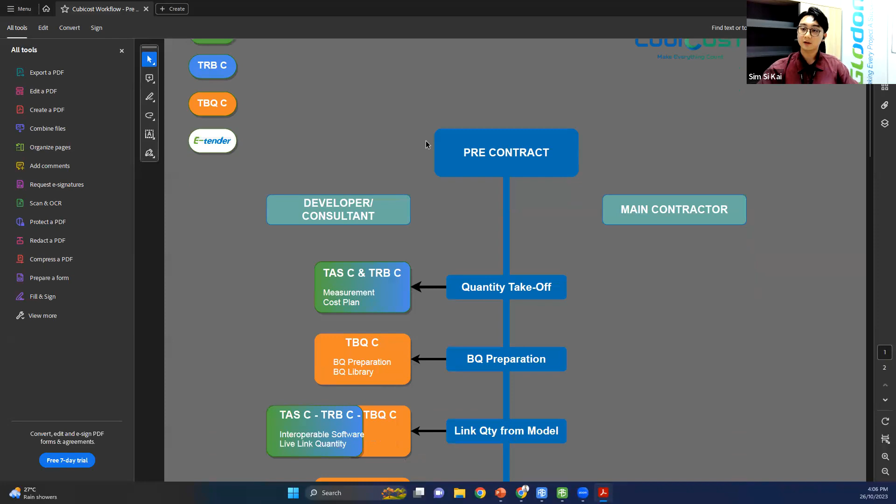This is a chart I created showing how our software can impact each stage during pre and post contract. Here we have the consultant, the main contractor, and the subcon. Let me open up a file for you to take a look. This chart shows the flow from pre-contract up to post-contract, and how our software can help at each stage. Basically, for quantity take-off, you can utilize our TAS and TRB to do the measurement, followed by BQ preparation, where you can price in your BQ for contractors. This is shown for the consultant, but no worries, the workflow can be implemented on the contractor side too.

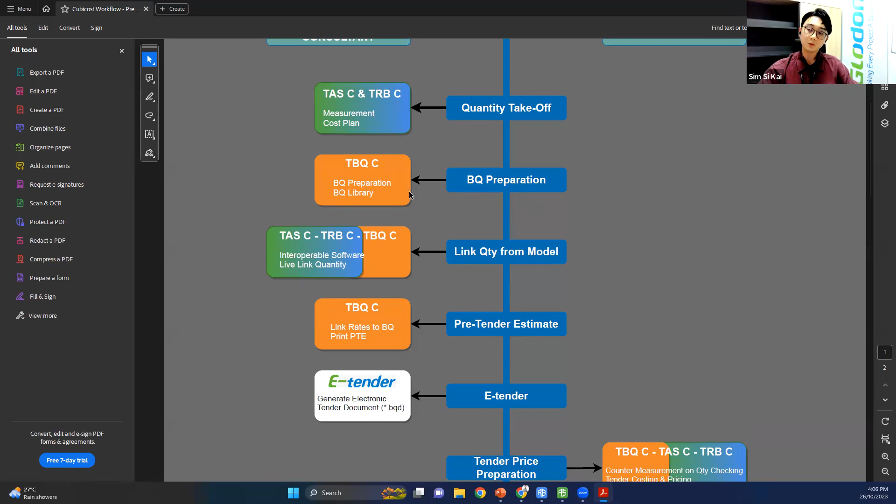And then once you've done your preparation for your BQ, next you can actually link those quantities to your BQ, and followed by you can actually do your pricing.

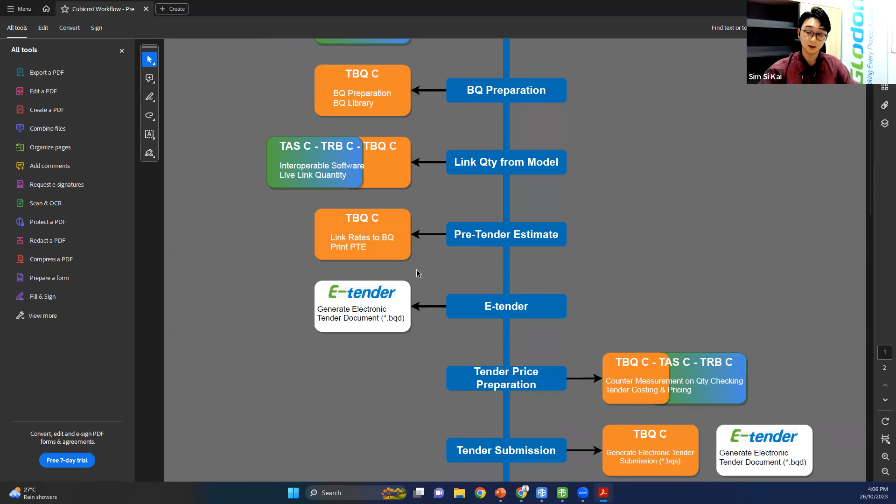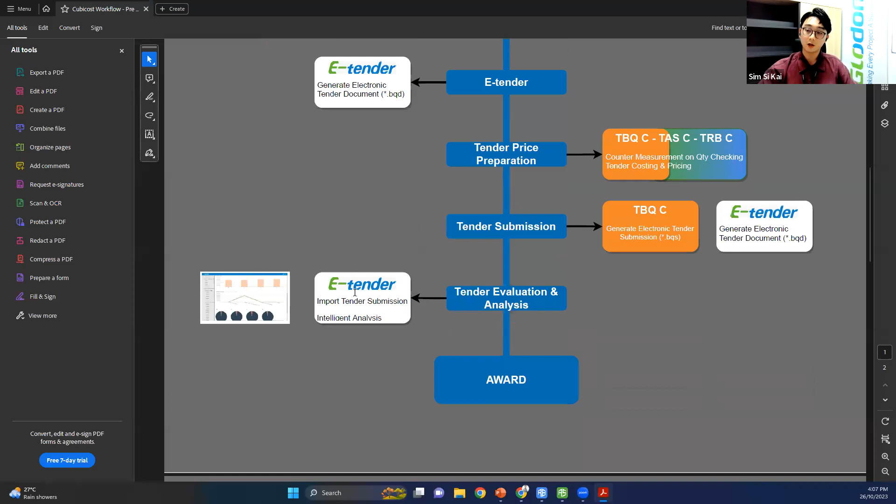And again, our TBQ software also has e-tender. So when you're dealing with a consultant that uses our software, they are able to prepare e-tender, which is what we call a BQD file. So for those contractors who have our software, they can import it into our TBQ software and begin pricing. Once they begin pricing, they can submit their tender submission, and then the QS will evaluate, and hopefully you get awarded the project.

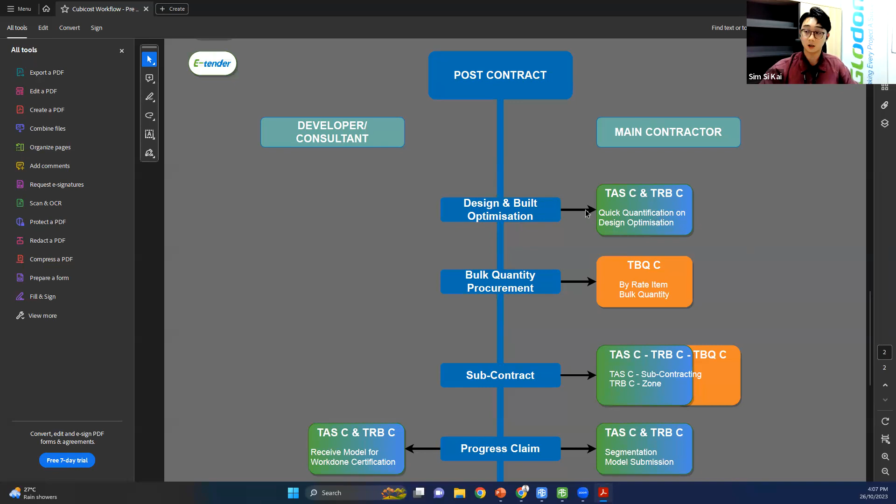All right, so now down to the post-contract. This is more focused on main con. As you can see here, design and build optimization. So you can utilize our software if there are any changes in your drawings, to make those changes and directly see the quantity impact. Then bulk quantity procurement, you can utilize a feature which later on I'll show you all how we can actually do bulk quantity procurement.

Followed by, you can also extract out, like for example during our post-contract, we do have progress claim and so on and so forth. You can utilize our software to do it. Or other than that, for example you have multiple subcons, you can also segregate those quantities accordingly based on those subcons.

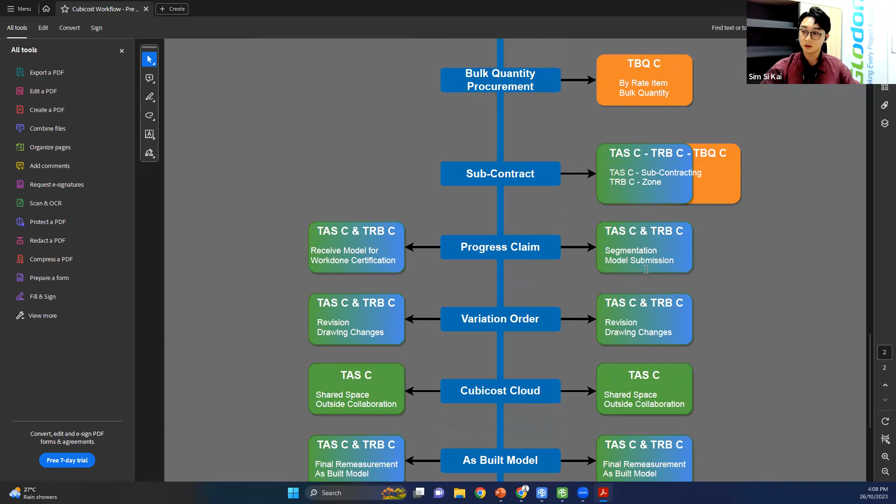Then in terms of progress claim, like I said, you can use our TAS and TRB software to do it, and followed by variation order also can be done. You can also share those models up to our cloud, whereas parties that do not have our software can access it and also view those models. And followed by, lastly, which is remeasurement.

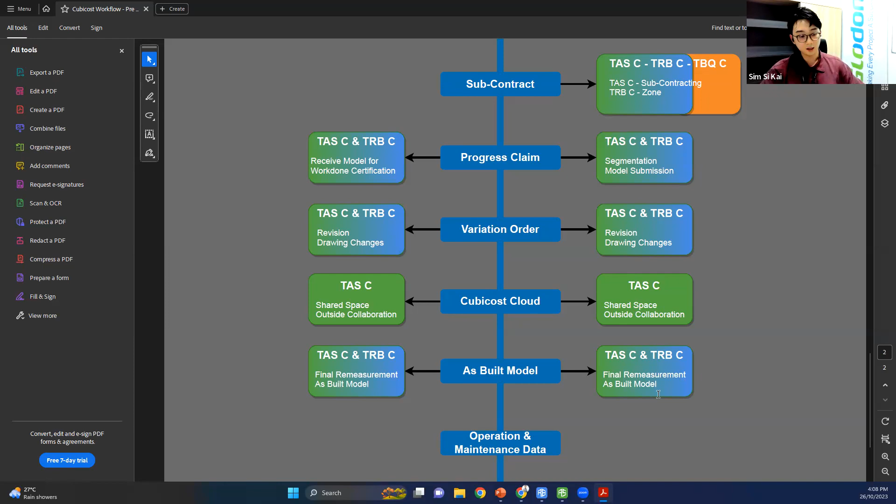If this flow is followed accordingly, basically when it comes down to remeasurement, there's no need to do remeasurement anymore because your model itself and your quantity itself is already up to date. And with that said, operation and maintenance data, and that's it. So that will be the pre and post contract.

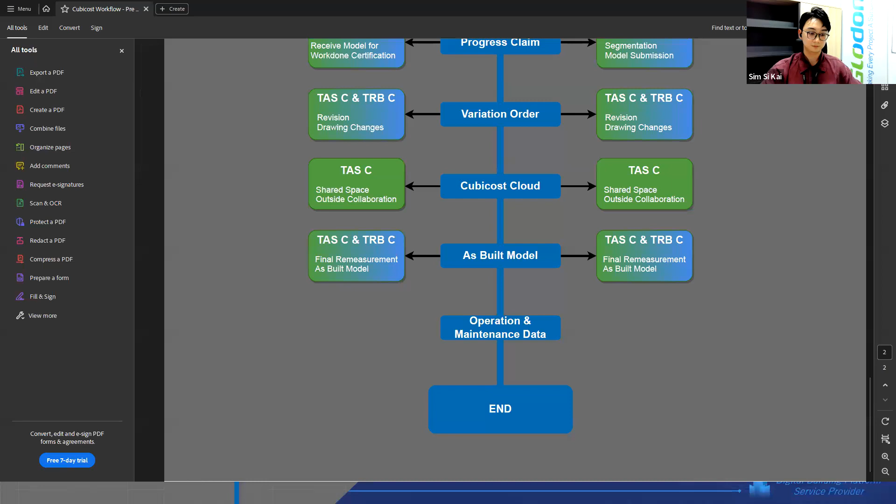So followed by, the next thing is why BIM? What's the purpose of BIM? Why do we need to do this? Why do we need to implement this so-called BIM flow? And what is the main benefit out of it?

And with that stage itself, when both parties are not communicating at the early stage, and only one of the parties joins after, there will be bound to have a lot of, for example, miscommunication. That will be the number one issue — miscommunication, or workability within that design itself. So when both did not communicate at the early stage, only after, that is going to cause a lot of errors at the end. And in the construction industry those errors can be solved, yes, no issue, however you tie back to cost.

So if using BIM, this BIM process is able to simplify, to create an environment, a platform where it allows everyone to stay communicating since the early stage, since the beginning, from design and construction concurrently. Everyone is actually communicating, everyone can receive the latest information. So by doing so, everyone is communicated, then the error will be reduced greatly. Again, when there's error in construction, yes it can be solved, but it requires cost.

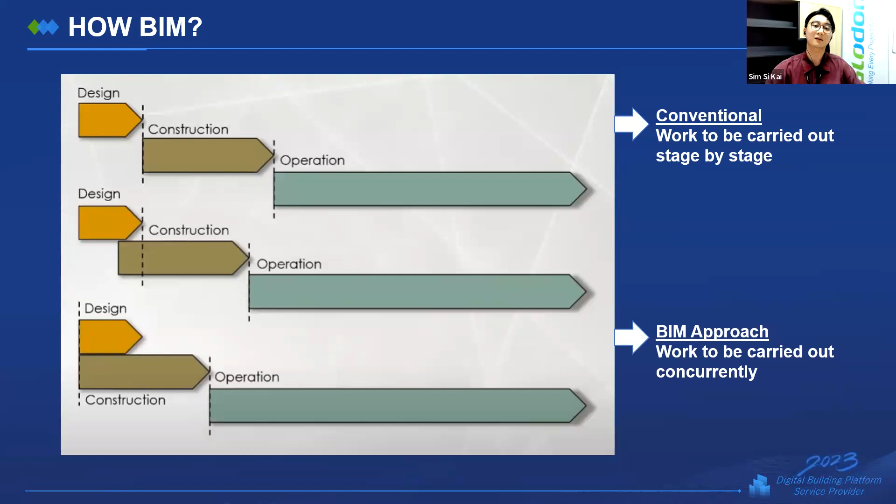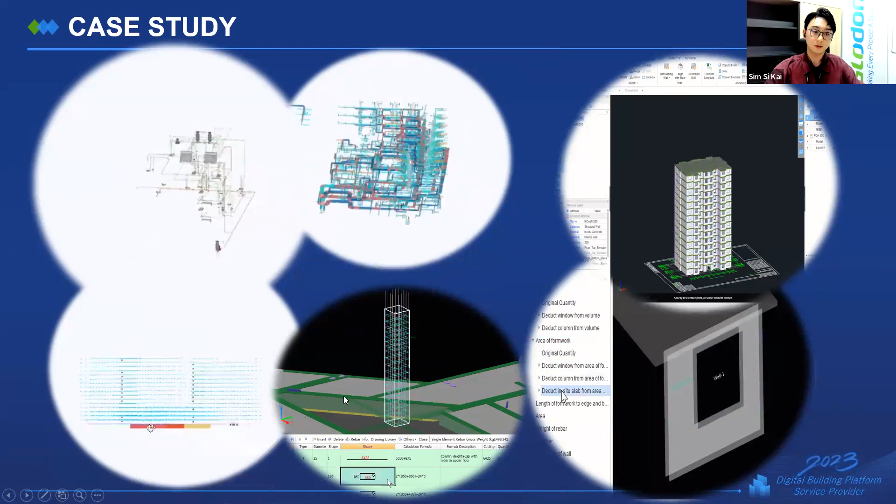How are you able to utilize all this software during tender bidding preparation? So there's a tendering checklist. What are the checklists that we require to go through? First of all, type of contract bidding. So we need to understand the type of contract that we're going to bid for, because that is going to dictate how we are going to do the pricing and so on and so forth.

Next, strategy based on contract types, quantity checking method, followed by tender costing and pricing, and lastly, electronic tender platform. So these are the tendering checklists that we have to go through first.

Let us go through a little bit of background on the types of contract biddings. There are several types of contracting approach between owner and contractor, and each supports different project environments and approaches. It is a must to understand what type of contracts for bid and procurement when receiving a tender, in order to know what strategy to adopt using Cubicost. So we need to understand what kind of contract we are actually dealing with, that way we can tailor our Cubicost workflow to it.

Okay, so the pain point. In Malaysia, I will focus on Malaysia. During the tendering period, it's always short, about 2 to 3 weeks, and 3 weeks is arguable. So normally it's about 2 to 3 weeks.

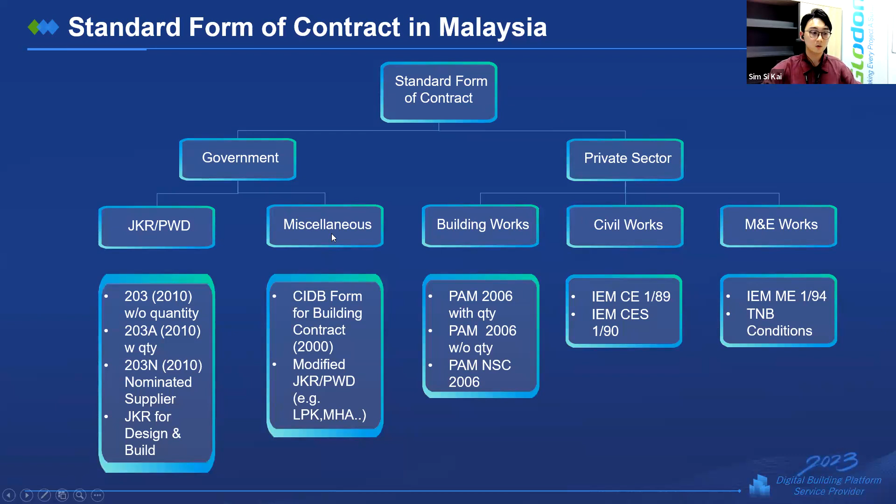So why do we actually have to go through all these PAMs and the contracts? Because I would like to bring up one important point. Contract or pricing arrangement, we have for example these 4 types: lump sum or fixed price contract, time and material contract where scope is not clear, cost plus contract, unit pricing contract. For these 4, we can't run away from one thing.

Quantity is the basis of cost estimation, regardless of multitude or magnitude. So you can't run away from quantity, you can't run away from measurement. So by using this 5D BIM solution, how can we help you increase your efficiency when it comes down to measurement? So, how to utilize Cubicost software in different types of contracts.

So again, this chart also would like to bring out the urgency of why using a 5D BIM solution is so important. Regardless of what kind of contract you are facing, you still can't run away from the basis requiring you to do measurement. So these are the urgency points I would like to bring up.

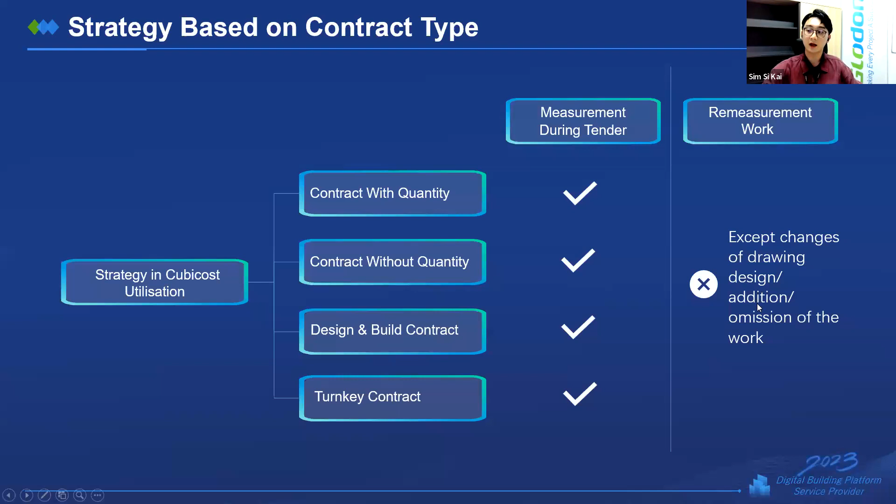So again, quantity checking method — background. For private projects, most clients will appoint a consultant QS for tender document preparation, inclusive of BQ with provisional quantities. Followed by, during the tender stage, contractor QS also receive tender BQ with provisional quantity and a whole stack of drawings, either hard copy or PDF soft copy. And then it's the contractor QS's responsibility to make sure the rationality of the BQ provisional quantity, which will form part of the contract.

So the pain point still ties back to what I've shared just now — during your tender stage, the duration for the contractor to do the bidding is very short.

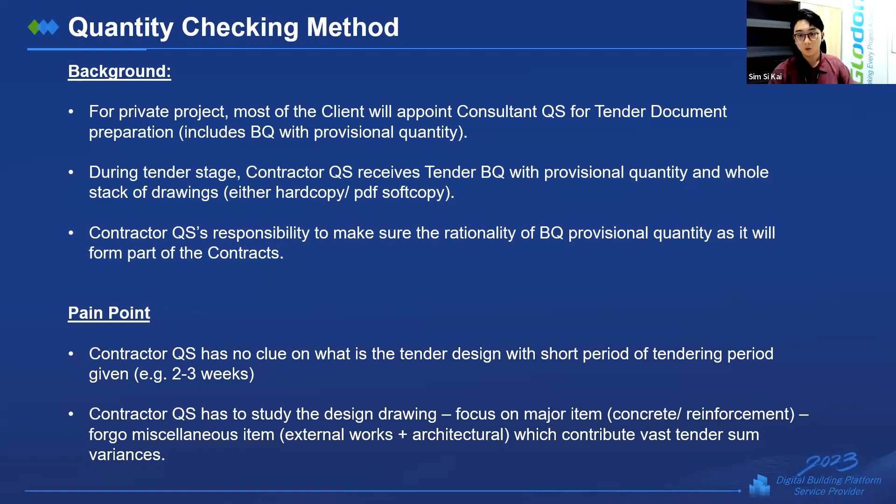If the nature of the project you're dealing with is very big, you do not have the time to actually check and reduce your risk. The only thing you can do is go through those trades that will bring a big impact in terms of pricing. We will actually go through that. Those miscellaneous items, we do not have time to go through, so we can only trust whatever the QS consultant provided to us.

So how do you actually do the quantity checking method? These are the things: quantification and report. You need to focus on these few aspects: quantification and reporting, drawing source, method of modeling, and also live link quantity. So in terms of your Cubicost software, how are we going to play around with this?

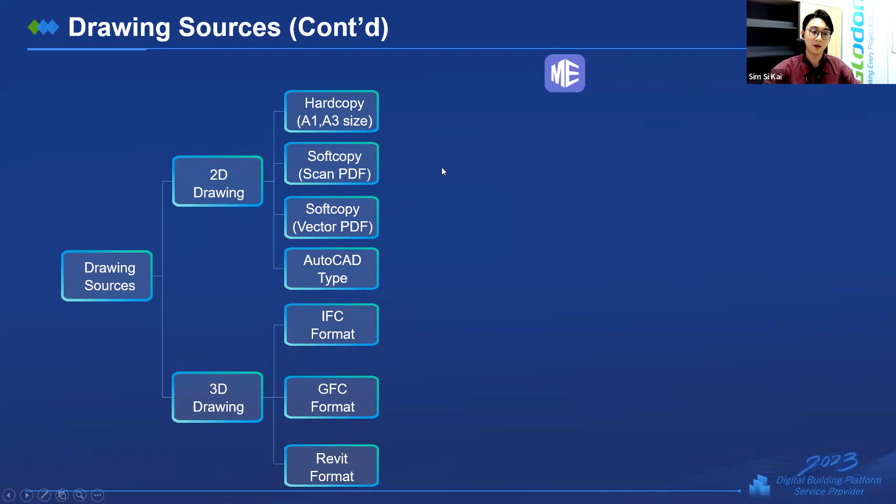So how is the software able to help you with each of these? Basically, TAS, TRB, TME can cater to both 2D and 3D drawing. In terms of 2D drawing, if you have CAD drawing or vector PDF, we have this function called auto identify method and auto, so it is much more efficient. But if you have hard copy or soft copy, we do have methods to actually cater for it.

Now let's talk about 3D drawing. When it comes to 3D drawing, the most famous one is Revit format. Can we actually communicate with other software? Yes, for example, with Revit, we can import the model into our software and then quantify it. There's also this argument stating, hey, I already have Revit, why do I need to purchase your software? Because Revit itself also does provide us quantity.

Yes, Revit does provide us quantity, but we have one thing extra compared to Revit, where our software is actually embedded with the local rules, which is SMM2. All QS measurement is actually governed by SMM2. So therefore, Revit yes, they do provide you quantity, but Cubicost software brings it to the next step, which is they provide you quantity based on SMM2.

In terms of manual method, we'll be creating manual element creation, element properties, and entity input method. In terms of auto, you can do auto identify, click identify, drag and drag, which I'll go through one by one later on. So in terms of 3D drawings, we can also import IFC files and also Revit folders.

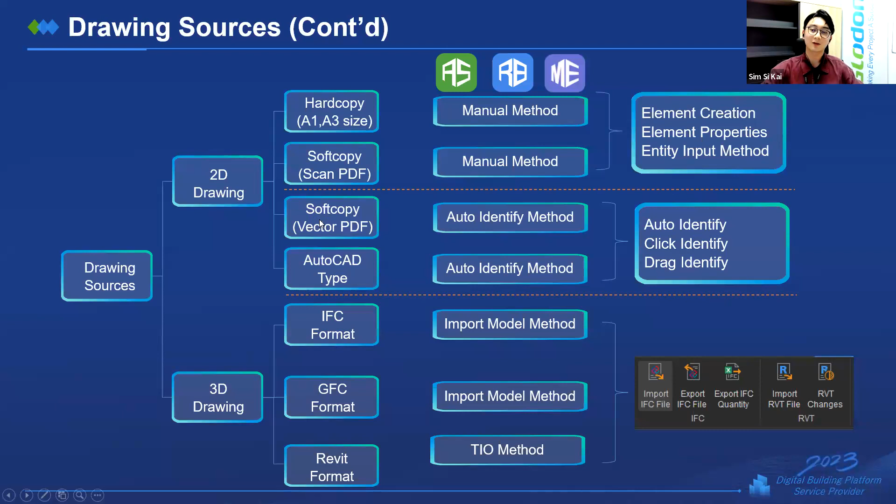But in current Malaysia, for contractor side, mainly they will only get soft copy, vector PDF, and if it's lucky enough or the contractor is willing to buy, then they will actually get the CAD drawings. So in terms of method of modeling, let's go through the background. The drawing type determines the method of modeling to be adopted by the user, so project type matters as well on what is the method of modeling.

Importance of resources availability and allocation: as you can see here, our software is a quantity takeoff software. In terms of the source of the data, it actually comes back to the drawings that you receive. The drawing you import into our software, then we will calculate from there itself.

So it comes down to pain points: contractor QS not familiar with the method of modeling available in Cubicost, hard to identify a champion user for one company to allocate the resources, and lack of confidence and practicality of work collaboration among colleagues. These are the pain points that I was able to list down for a user, for example, a contractor who just needed to adopt our software. These are the pain points they will actually face, but no worries, me as a customer success consultant will be there to help you.

So without further ado, let me show you my software. What can you actually do?

All right. So from here, as you can see, this is the software that we call TAS C, which is measuring architectural and structural work. So from here, this is where all the projects that I've done previously are. From here, you're able to create new. By clicking on New, you can actually create a project.

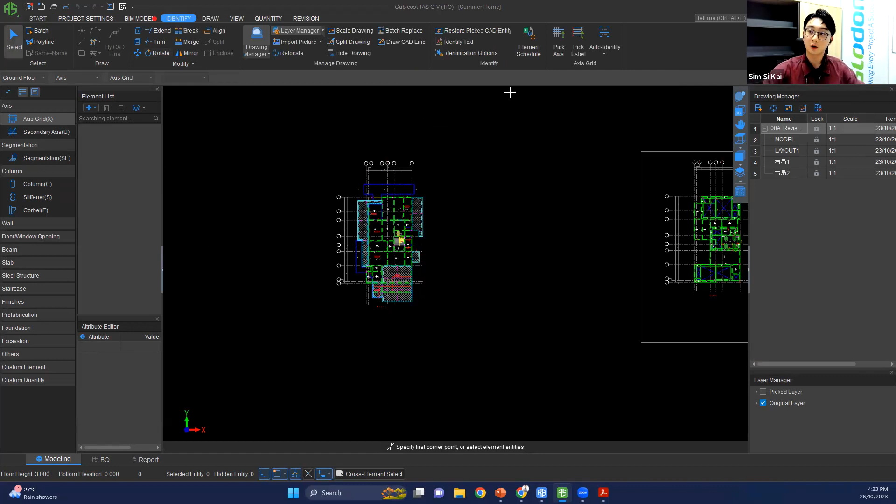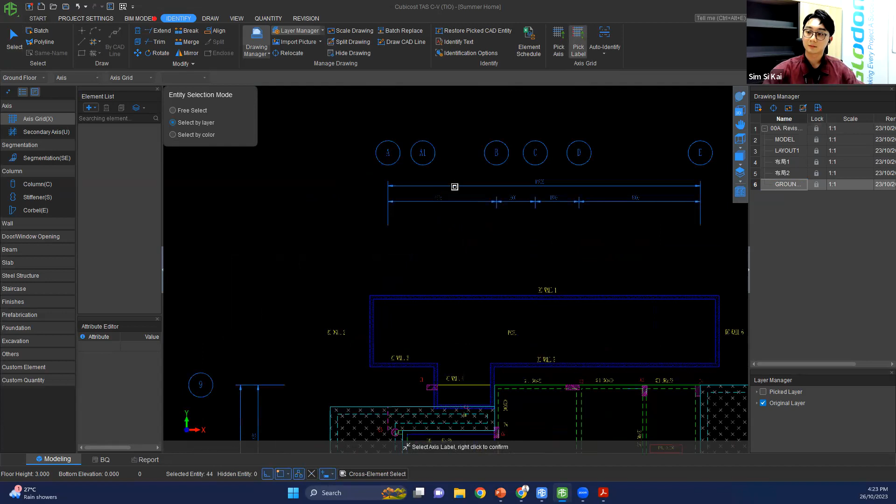And then here is where you can also input the number of floors for each one of the zones, basically. So once you're done, you can proceed to begin modeling. So how our software works when it comes down to modeling is you can add in the drawing here. So for example, I will use the structural. As you can see here, once you're done, you can begin creating your model. So first, I will split the drawings. And once I'm done, I'll just create an axis point. And then auto identify. So let me show you the drawing.

So now I'm going to demonstrate how we can calculate concreting for column, which is your meter cube quantity for column. So from here, we can directly use this auto identify because we are using CAD drawing. So you can use Pick Sideline. And with that said, you have successfully modeled out 34 columns with ease.

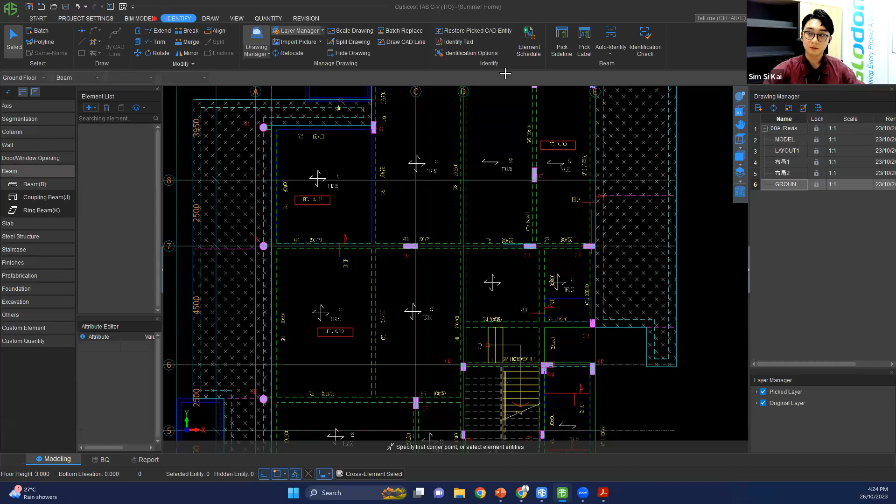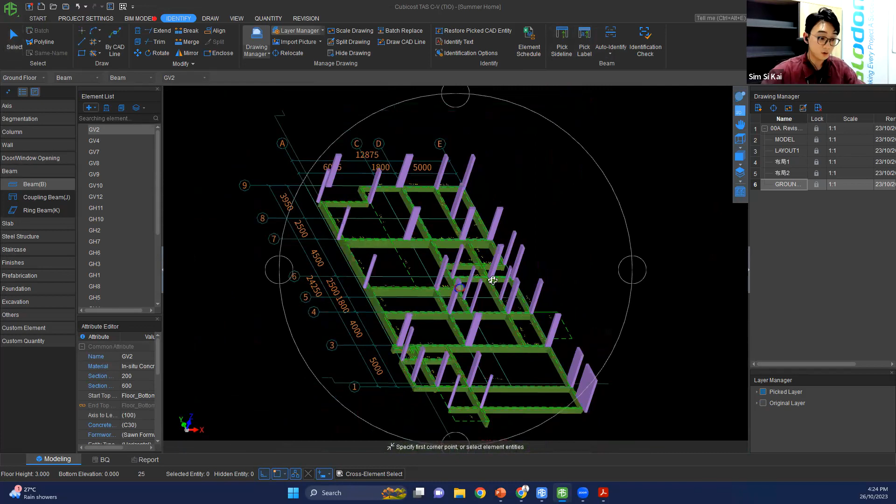So let me show you another element, which is beam. So you go through beam element. And with that said, in a matter of seconds, you're able to generate the beams already. But of course, this is if you are using perfect drawings. Whereas if you're not using perfect drawings, we also have this thing called identification check. It will help you do a quick check in terms of what you have identified and what errors our software is able to detect.

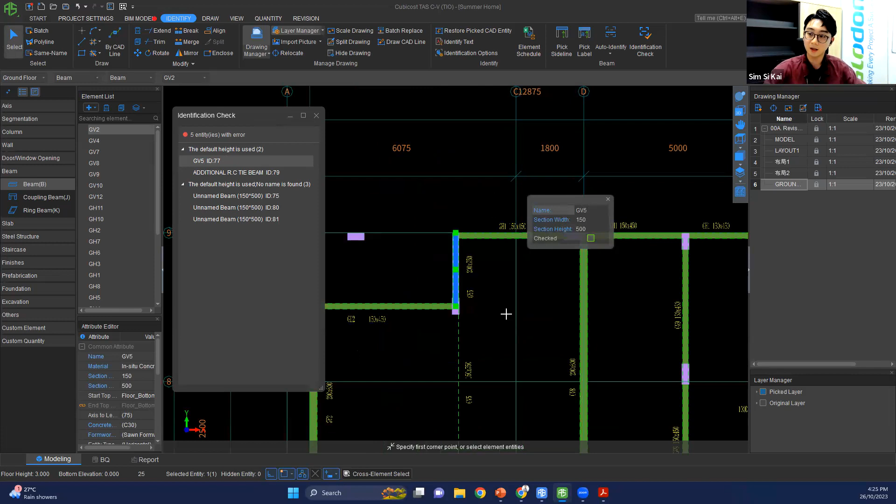You can click one by one and it brings you directly to that particular beam and shows you what the error is. For example, there's a discrepancy here, GV5, 150 times 500, but here it's stated as 200 times 750. So which one do you want to use? For example, I choose to use 200, then you can just adjust it from here. Okay, then just check, and the error will be gone, which means you already checked this error and made the necessary adjustment.

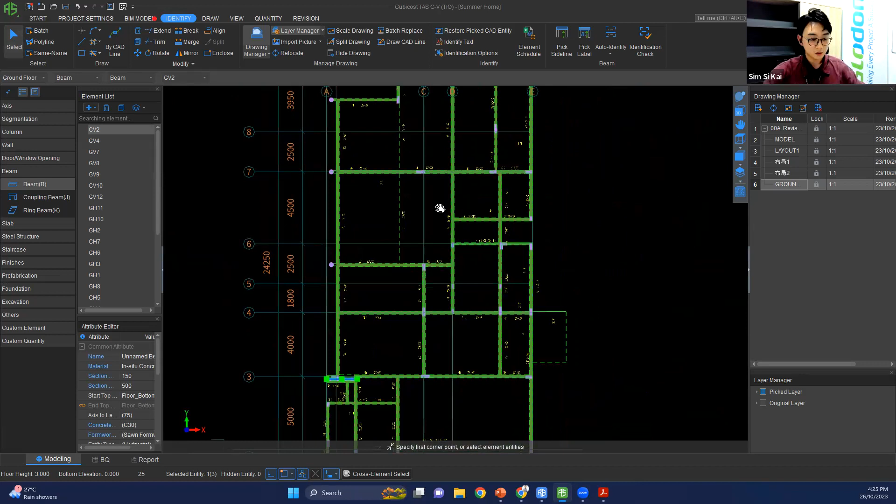So for example, unnamed beam, this is an unnamed beam. So do you want to change the name? Yes, you can change it. Once you change it, you just check it. Then with that, that error has been checked. All right. So you see, when it comes down to modeling, it's actually very fast. But of course, we also have a contingency plan where we allow users a quick method to do checking.

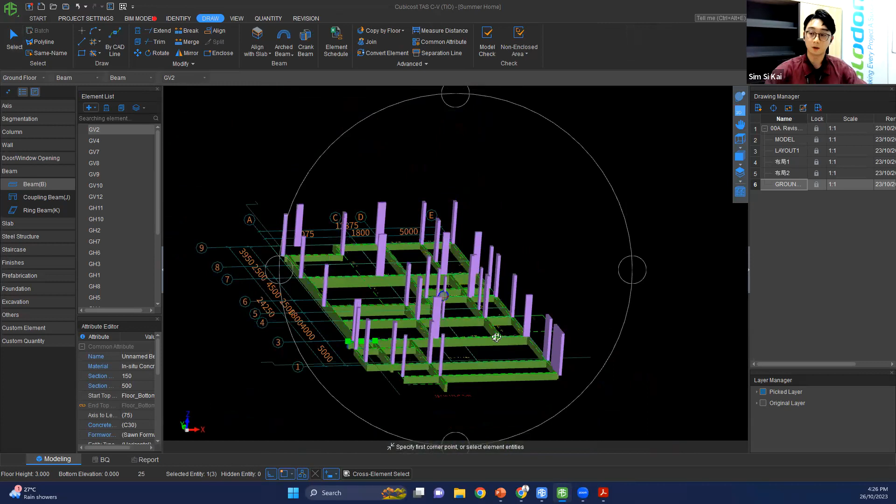All right. So this is how you're able to do a quick take-off. If you have CAD drawings, you can use this auto-identify method to quickly model. And from there, all you need to do is just calculate the whole model. Because once you do the model, you have to calculate, and then our software will base it on the rules that we pre-embedded, which is what we call the measurement settings, where it will follow all these rules that you have already set accordingly.

Then you'll actually generate out the quantity based on all these rules. So this rule governs the quantity that is going to be generated after.

In terms of measurement settings, this is where you base things on for SM2 - for example, how you want to define above which height is considered supporting height. So you can come here to set, for example, the starting height to judge supporting height is 3.5 meters. You can set this formula or value accordingly here.

In terms of measurement rule, this is where you can set what deductions you wish to make. Once you're done, you can view quantity by category and press OK, and it will generate a table for you to see what quantity is being captured.

In terms of checking, it's also very easy. You just have to select one of the cells, for example this one, and click check model. It will bring you directly to that model to tell you, okay, this is the beam, and this beam's total quantity is 2.0, for example. Now, how does the software get 2.0?

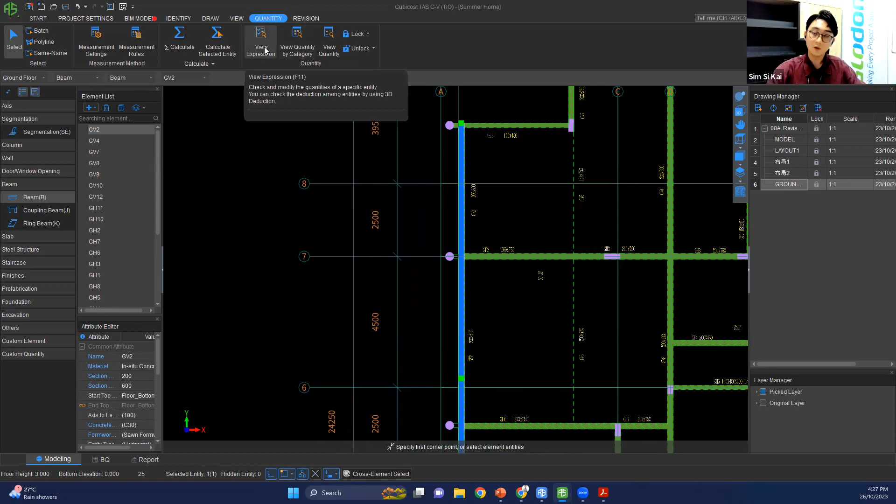You can view expression. By clicking on view expression, it will give you a detailed breakdown on each of the quantities - how it's actually calculated. As you can see here, meter cube - this is the description, the quantity expression, how the software actually captured that quantity.

In terms of wording, it's a bit hard to understand, but you can always trigger this function, 3D deduction. This is the original quantity, and these are the beams that it deducts. So everything is very transparent.

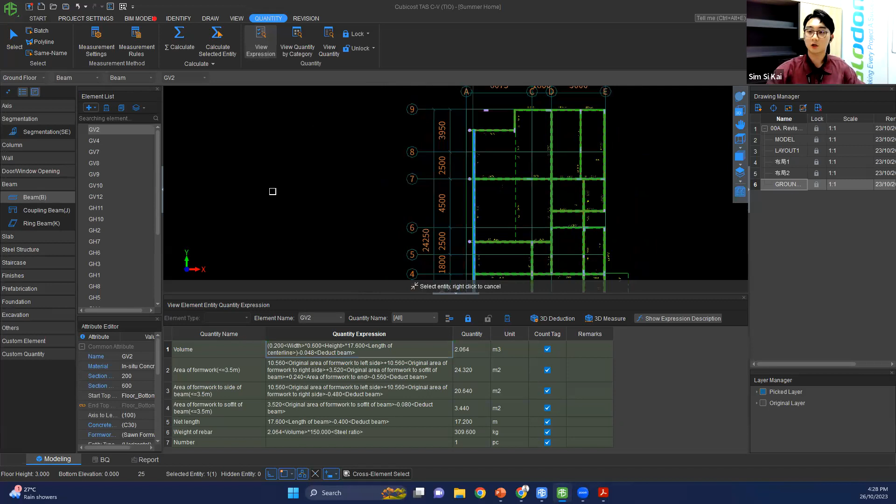Everything is traceable, so that's where you can utilize our function within the software to quickly model and get a quick quantity. That's in terms of concrete, formwork and finishes, which I'll show you later if anyone is interested. But now let's talk about rebar.

So how can we bring this model into rebar? Basically, to our other software, which is TRB, we can come down to BIM model. Under BIM model, you can actually export this model out by floor, for example.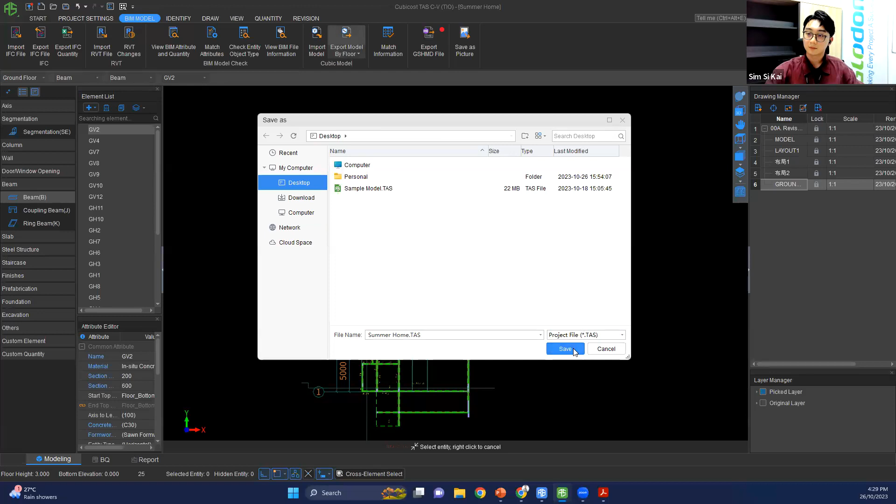Once you export it out, that's where you can go to your software to import it in. Assuming I've already imported the model - this is our other software, which we call TRB. TRB is mainly where you can capture your beams and rebar quantity, whereas TAS focuses more on architectural and structural.

So all you need to do, for example for a column, is key in the rebar information here and calculate it. The outcome is it will provide you a detailed breakdown on how our software actually measures each of those rebar. So let it run.

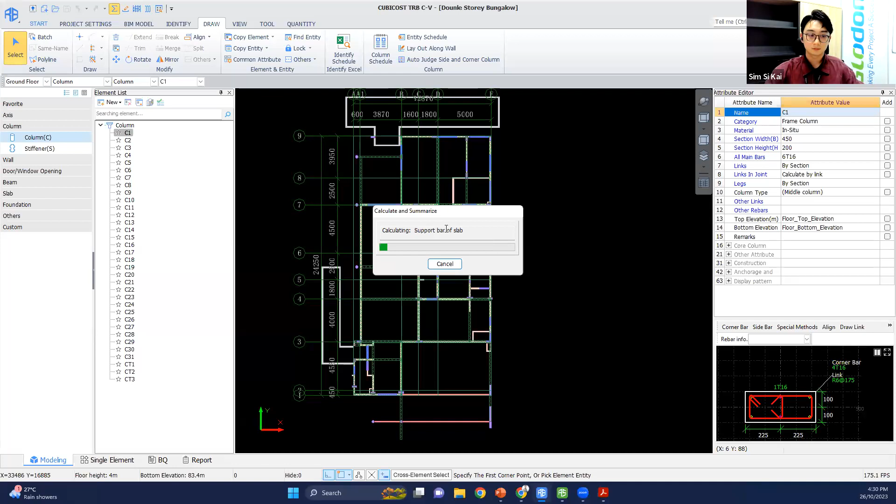Let me show you in 3D. For example, this column - I can view the detailed breakdown of how the software actually measures for those rebar.

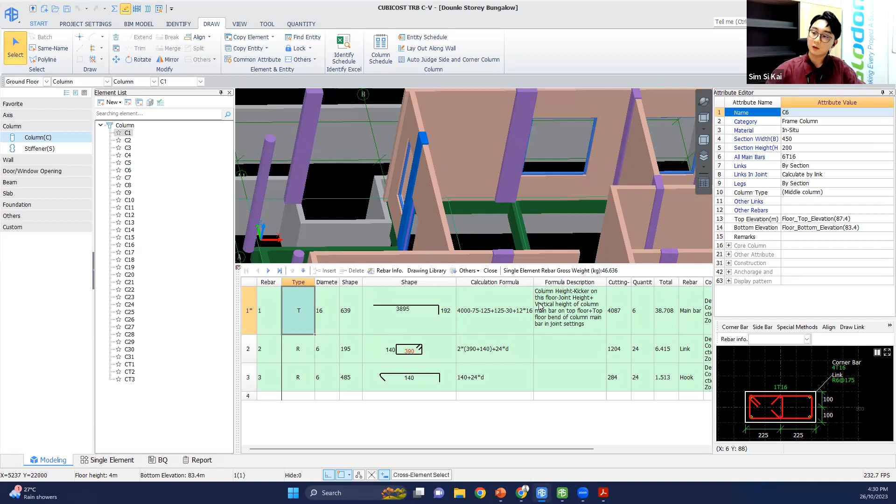But again, by viewing this description, it's a little bit hard to actually understand unless you go through the formulas accordingly - then you can see how the software actually does the calculation.

Or you can trigger this function, which is rebar 3D. When you trigger this rebar 3D, it will provide you an actual rebar 3D view to show you how the software actually measures.

But by just reading this rebar 3D, I couldn't actually understand that much. But when you click on, for example, this first expression, it will highlight to you how the software actually calculates these highlighted bars.

Back when I was doing my degree in Taylor's for quantity surveying, I had this issue - I couldn't imagine how the rebar actually runs. But using this software, with the view of this rebar 3D, I'm able to actually imagine whatever rebar I have measured. I can also cross-check with my drawing to see if I missed anything or not. So it's really easy for us to do checking.

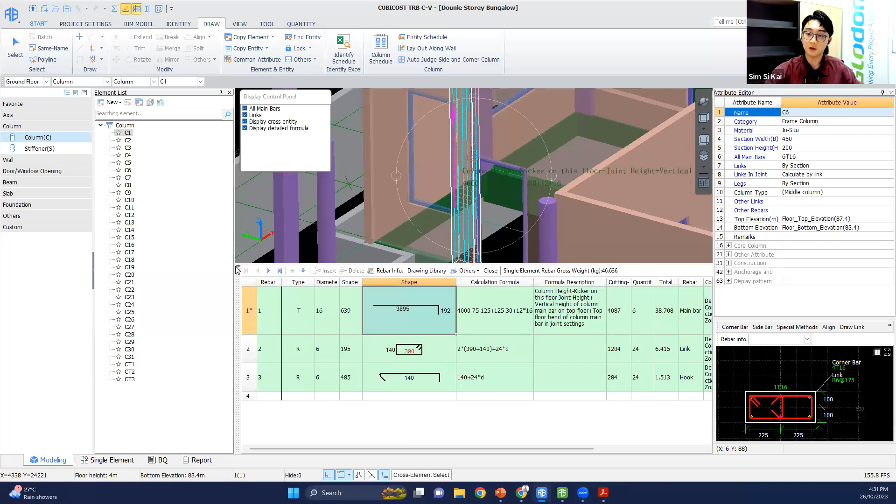Other than that, it will also provide a detailed breakdown in terms of quantity, similar to what TAS is able to do. As you can see here, it will provide a detailed breakdown of, for example, your wall and what the total number of your quantity is.

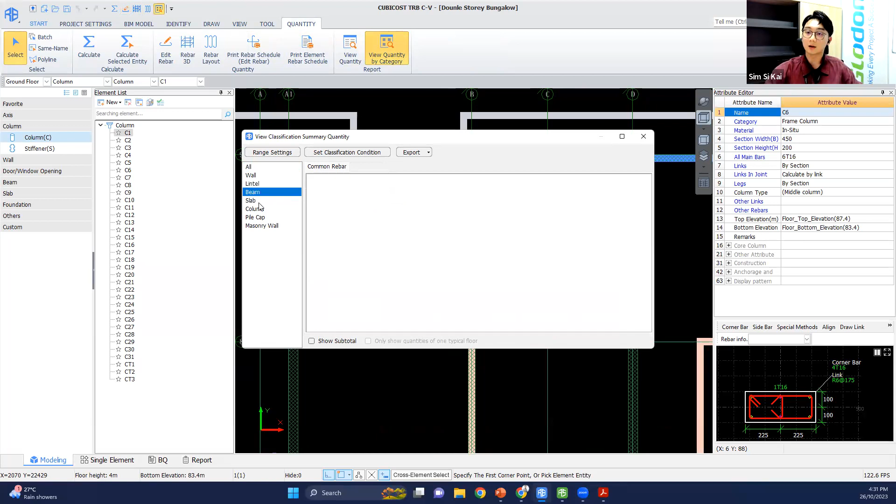So your beams and so on and so forth. And of course, our software also provides you a bar bending schedule for those contractors who can, for example, share this with your bar bender: the total length of it, what's the link size. So with that said, you can actually reduce wastage. Our software is also able to do so.

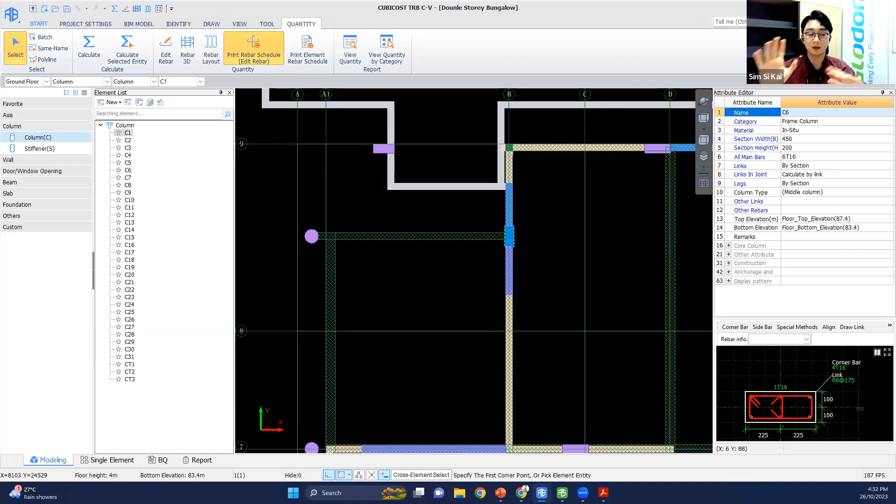Okay, so that's the general concept of what TAS and TRB are able to do. For those who would like to know more in depth, you can contact us, and I can arrange a demo session personally with you all to showcase more features of how our software can do the taking off. But that's the general concept of how you can utilize both TAS and TRB to do the measurement based on CAD drawings.

So let's proceed back to the drawings. Now we know that TAS and TRB are able to help contractor QS do measurement, but how are we going to arrange the manpower? Now that is the tricky part. So from here, I have drawn a chart for those contractors who listened to our demo before and want to know how our software can help them in a much more fluent process. So this is a chart that you all can see.

So if you start from TAS, one QS who is very experienced with our software can do the basic work, for example, creating the axis grid, setting up the measurement settings and measurement rules, and creating the floor settings. Floor settings, axis grid, and the measurement rules and measurement settings. These are the most important things that you need to set properly first before you do the collaboration with other QSs.

So once you're done, the main QS will share those files to, for example, QS1 podium, QS2 tower A, and QS3 tower B. Then they will work based on their respective zone, respective file. And once done, they can combine these three different models into one, then export out to TRB.

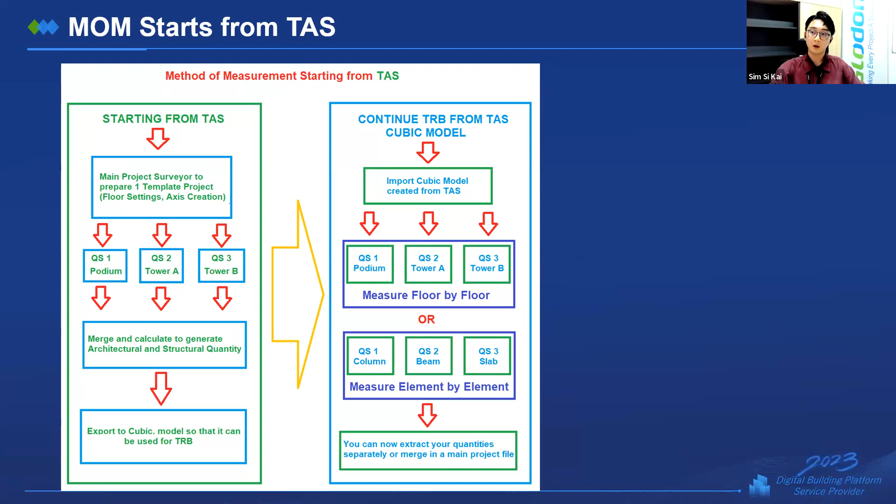Then from the TRB perspective, they can import the TAS file. From there, they can either measure floor by floor based on the podium, tower A, or tower B, or proceed by measuring element by element: column, beam, and slab. And lastly, you can extract all the quantities accordingly. All right. This is where you start measurement from TAS.

However, if you start your measurement from TRB itself, it works the same. You need to create what we call a master file. That master file also has to consist of your floor settings, your axis grid lines, your calculation rules, and all these have to be done properly by one QS. Then you can share those files with all the team members working with the main QS.

Then once they're done, they can merge it, export it out and send it over to TAS. On the TAS side, they can import the model, and the QS can continue their architectural work based on zoning, for example: zone 1, which is podium, zone 2, tower A, and zone 3, tower B. And then after that, they can calculate and extract the quantity accordingly.

So these are the two workflow methods that I would normally advise clients to adopt, because the flow is much more smooth, no license is wasted, and everyone is able to do their work in a much more fluent way.

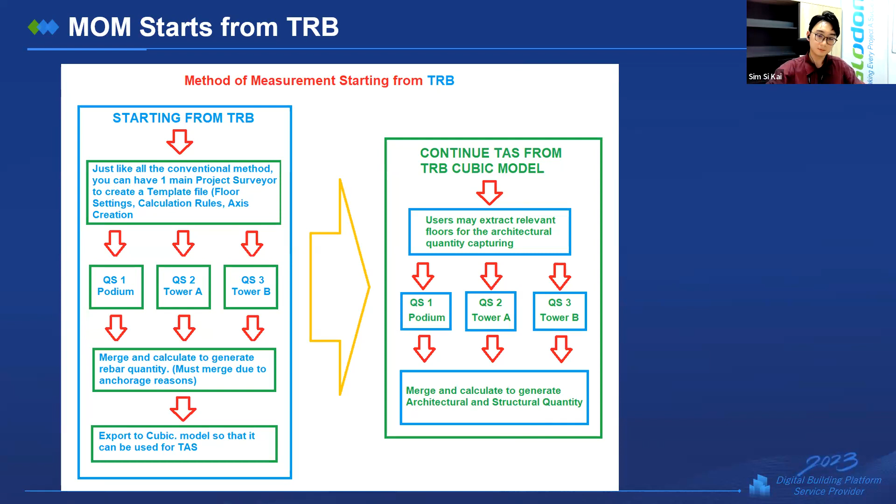All right. So again, set project information, create zones if necessary, set bottom elevation and floor height for each zone, set grid settings for each floor and zone, and then identify the axis. One master file, send it to each one of them. They can rename it and later on merge it back. So that is the idea, the concept of how you can do your taking off using TAS and TRB.

Now, when it comes down to costing: just now what we talked about is measurement. Now we talk about costing. As background, with the quantity and the BQ generated by Cubicost, contractor QS have to prepare costing using productivity measurement or first principles of estimating to build unit rates for self-performing works, and source quotations for specialty works. After costing finalization, contractor QS will have to mark up the cost as a tender bid price for submission. Pain point.

Where is the base rate? Rationality of the base rate. Validity of the rate. And also, again, lack of time for insight on price analysis. So how can our software help you, which is what we call TBQ.

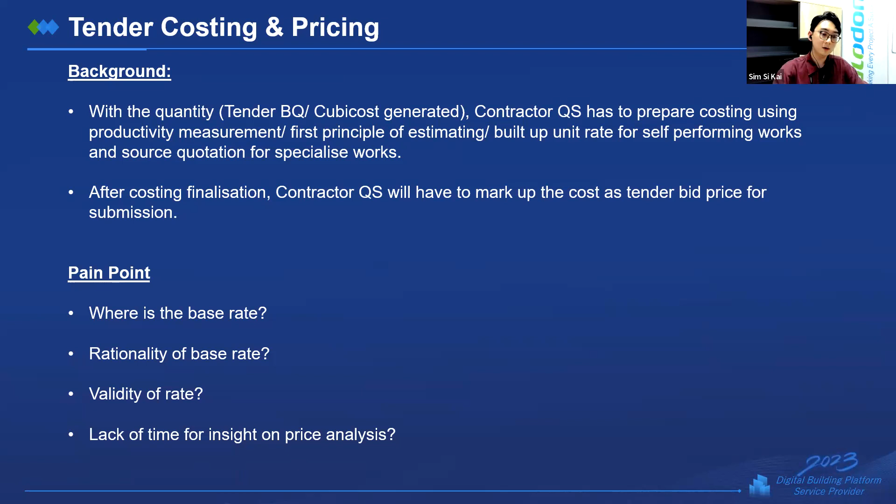So TBQ itself allows users to actually build up their unit rates, basically build up the rates. So first, build unit rates, then compose a live link rate to BQ, check and adjust, and analyze. So basically, they need to create unit rates using our software interface, and then link those rates to bill items. And then if there is a need to check and adjust, they can check and adjust and then analyze afterwards.

Now, using our live link of rates to our bill items, there's one benefit there. After you do your checking, you may find out that with the current rates that are priced in, you burst the budget. So with that said, I need to readjust my rate. So we talk about the conventional way. The conventional method, when it comes down to adjustment of rates, is very time consuming.

Why? Because once you adjust one rate, you have to go through all your bills to make sure whether the rate that you adjusted is linked to other bill items or not. Then you need to go through one by one to check it and readjust it. Whereas in TBQ, you just adjust the rate in what we call the build unit rates here. Whatever bill item that is live linked with this particular rate will automatically adjust accordingly.

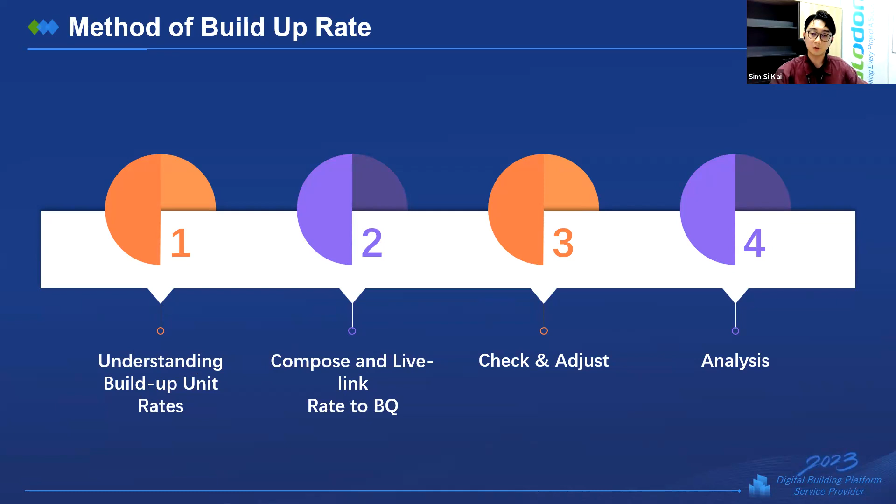So when it comes down to that, human error can be reduced. With the conventional way, the human error is actually quite high. But by using our software, that error can be reduced. All right. So how do you actually build up those rates in our TBQ software? Basically, this is the unit rate. And what does a unit rate consist of? Mostly material, labor, and also equipment.

Using our unit rates, we have three types of methods to build up those rates. First of all is all-in rates: just input an all-in rate to form an all-in unit rate. Then for those who want to break it down by material, labor, and equipment, you can input total material, labor, and equipment cost to form the unit rate. But this one is a lump sum for material, a lump sum for labor, and a lump sum for equipment.

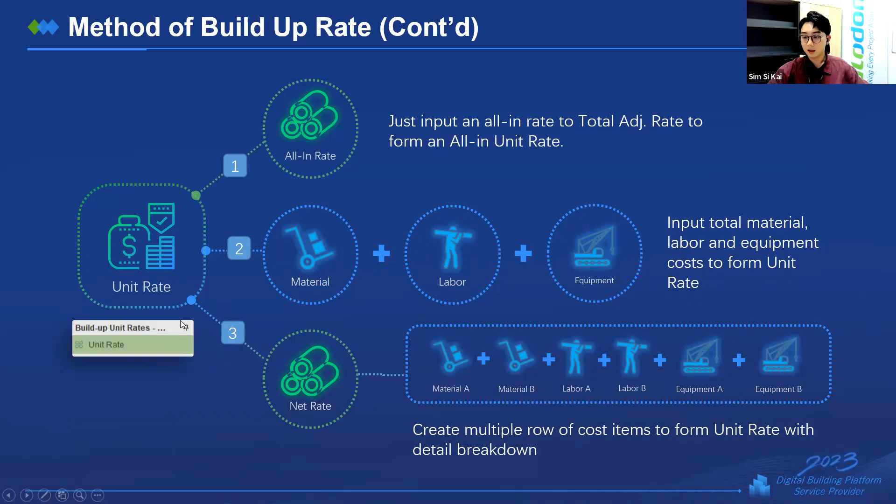But the contractor side, or should I say subcons, are much more specific, much more detailed. They can break it down, for example, material A plus material B plus labor A plus labor B plus equipment A plus equipment B, then only form unit rates. So these three methods can all be done using our software. Let me demonstrate this bottom part for you by viewing this video.

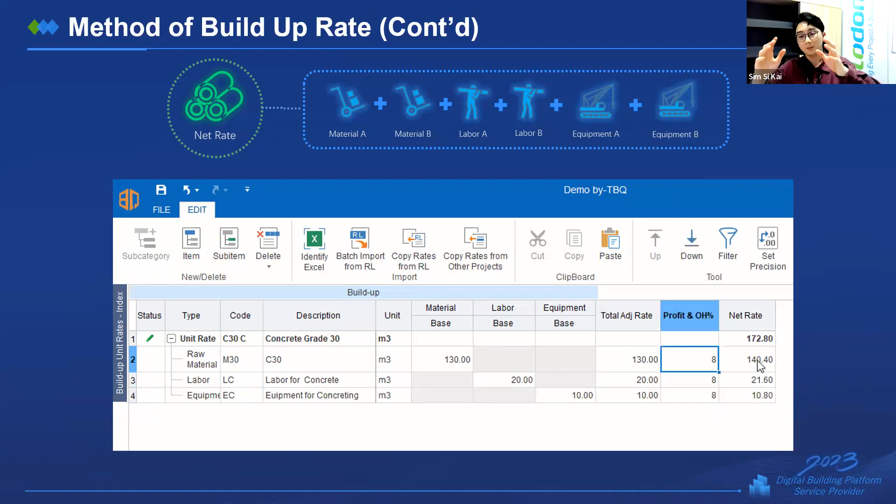So you can create the unit rate first here. Then you can key in a lump sum. For example, sub-items: raw material, labor, and then equipment. So you can break it down like this. This is a very common method that I normally advise our contractors when they're very particular on their unit rates and require a very detailed breakdown: raw material A plus raw material B, plus labor A, labor B, then your equipment A, equipment B, to only then form your unit rate. This one is often used by our contractor QSs, and this is how we also advise them on how to create it.

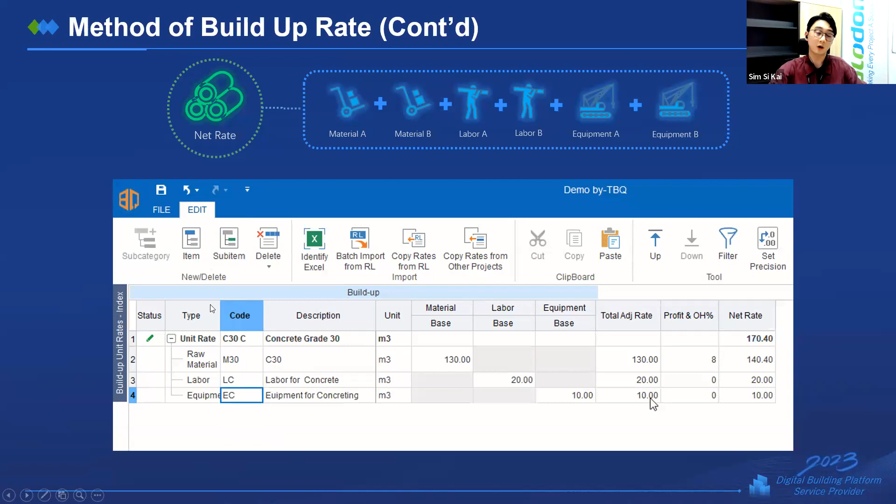Okay. By creating this, some of you may find it very time consuming. However, it's okay. You can also reuse data that you have done previously in Excel format. You can bring that information from Excel into our software and utilize it to do your pricing. So no issue at all. Or you can also use our designated tool to access the National Construction Cost Centre web portal to check for the latest trustworthy national cost data. And lastly, if you use this build-up unit rate, it will provide you a price analysis to help you do pricing in the near future.

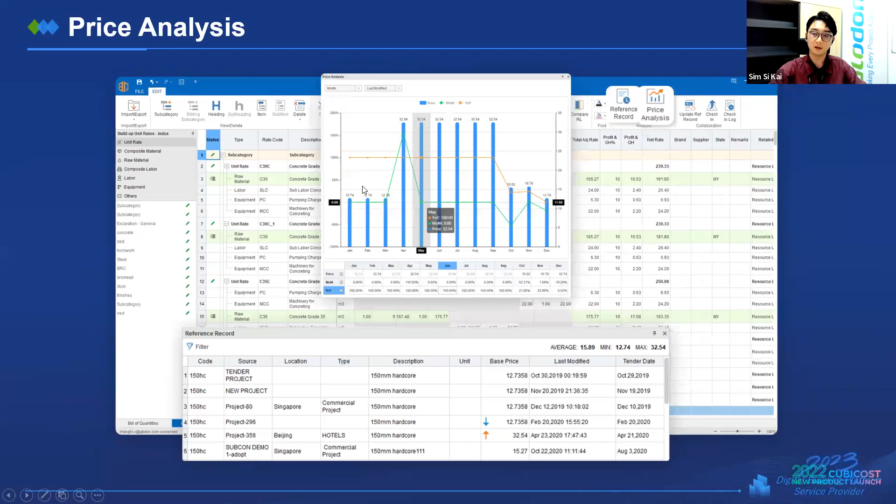It's much more, it gives you an analysis to help you refer to when it comes down to future projects. You can refer to this data to price at a much more competitive rate.

So it supports two dimensions of analysis, last modified date and tender date. An interactive graph allows you to show and hide data easily, and data is shown in tabulation to enable the user to snap the screen conveniently. So it's interactive and more detailed.

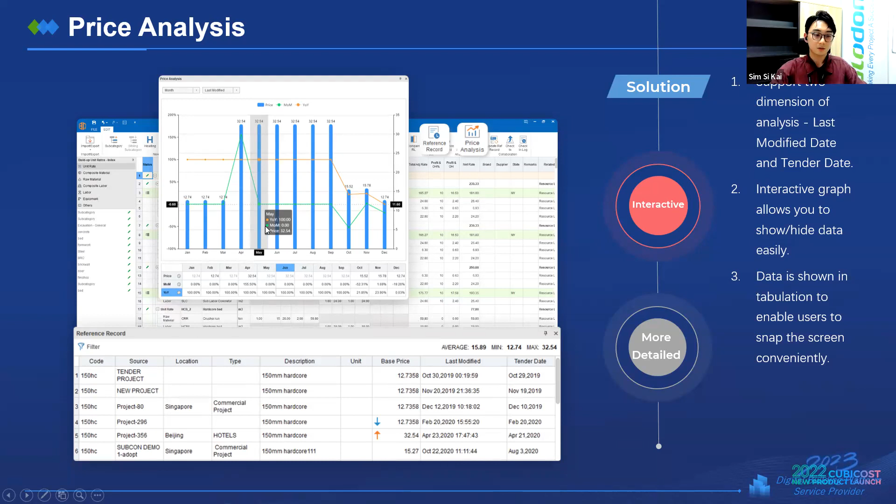This is a standard workflow that we normally advise clients to do. Identify from Excel, build your new rates, then import from project to your resource library. Once you've done this process, you can bring this resource library and import it into your future projects. You don't have to create those unit rates from scratch—you can apply that base to multiple projects in the future, and those rates you copy over can be adjusted based on up-to-date market price value.

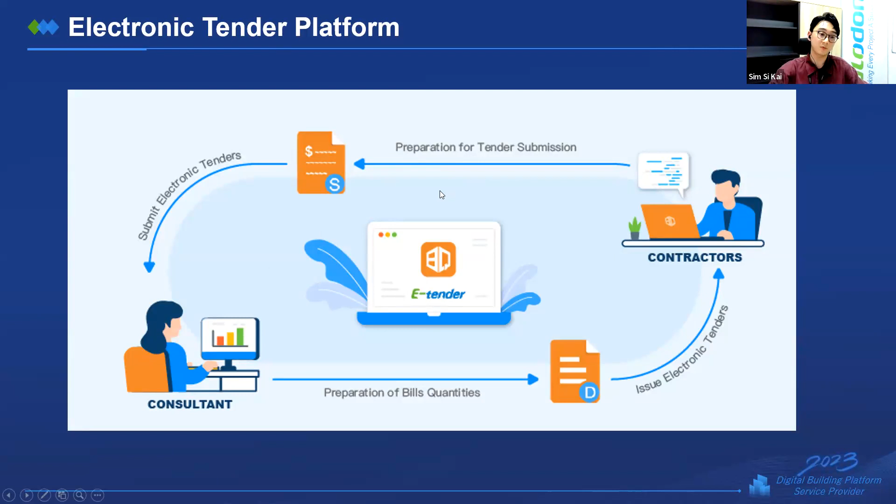For those who actually utilize e-tender, they can bid using our TBQ software. For contractors who deal with consultant QS that utilize our software, they will receive a BQD file. Once they receive a BQD file, they can upload it into our TBQ software or our webpage, price it, and submit back to the consultant as a BQS file. There are two different workflows.

One is with the e-tender contractor, who does not purchase our TBQ software. All they need to do is open the website, log in to e-tender, import the BQD file, fill in the quotation, and submit back using BQS. For those using our software, they just need to upload this into TBQ software, build out the price, fill in the quotation, and submit it. So the flow is very smooth.

So now I will focus more on the pre-contract part—actually, now I'll focus more on the post-contract. Let me open up my software and open a model file that's much more complete, so I can show you the post-contract workflow.

When it comes down to post-contract—since I've covered the majority of pre-contract—how can our software help you? Now let's talk about post-contract. Due to time constraints, I will directly show you through modeling how we actually do post-contract in our software. So for now, let me go to the ground floor.

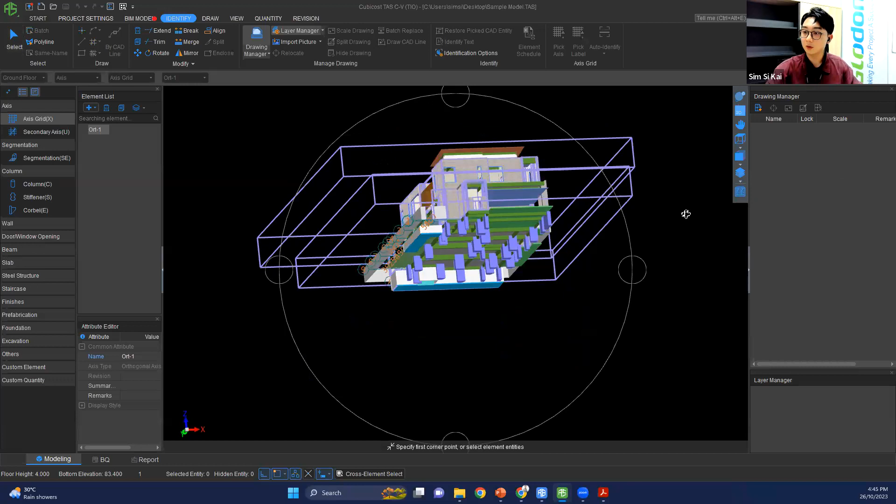This is a model I've created, which is a normal 3-story bungalow. So how can I do a post-contract item, such as, for example, a progress claim?

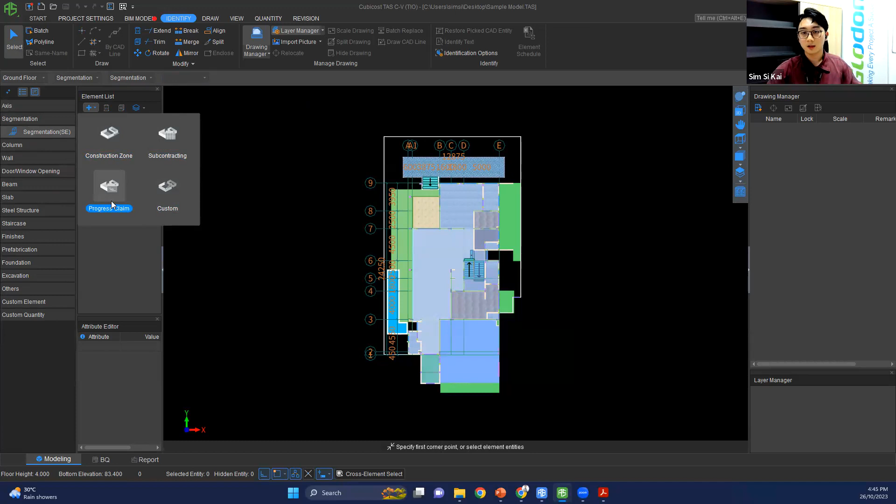For example, segmentation—in our software we have this thing called segmentation. We have 4 types: construction zone, subcontracting, custom, and progress claim. Often our contractor QS will utilize our progress claim feature.

For example, progress claim—this is where you can select the trade or work that you wish to claim under this first progress claim. Press OK, and from there you can highlight the area you're going to claim under progress claim number 1. The following month, when you wish to do progress claim number 2, you can create all trades again and highlight again. But before I highlight, you can also change the color.

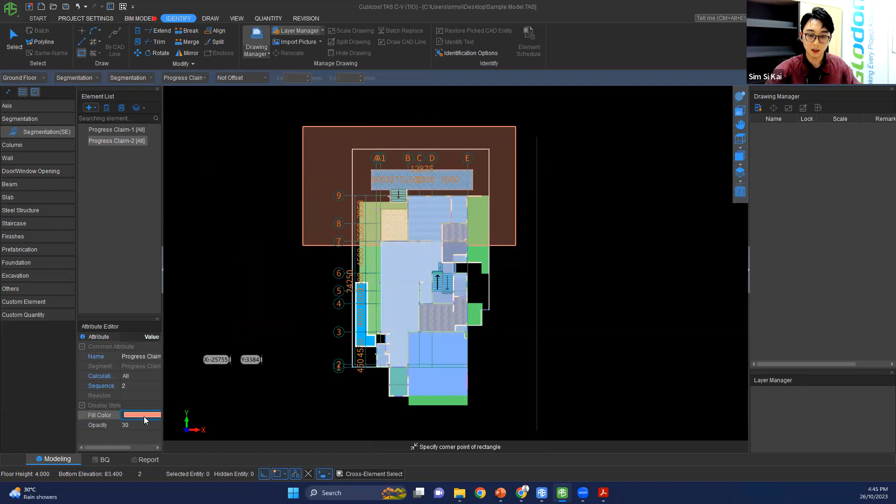You can change the color, for example to green, then highlight that respective area. And don't worry—when there's an overlapping area, the software will not allow you to overlap it; it will help you remove those areas.

So this is one of the methods to generate your progress claim—after you calculate, you can view how our software actually calculates. For example, once it's done, let me open up one of the elements so you can view how the software calculates.

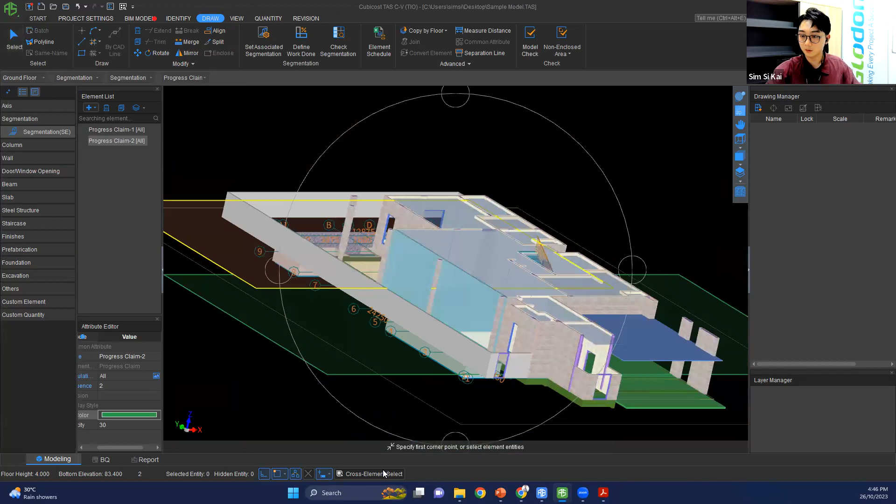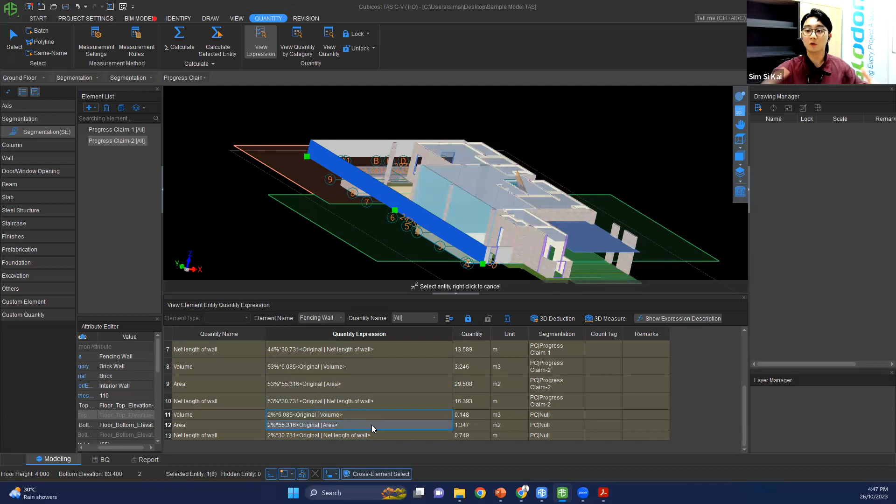So for example, this one—as you can see here, it will tell you 44% is captured under progress claim number 1, progress claim number 2 will be 53%, and the remaining 2% is yet to be captured. So our contractor QS can utilize this feature to prepare their progress claim.

This is one method they can use to prepare their progress claim, but there are also other methods. Another type would be, for example, your column—for progress claim number 1 they claim concreting first, then formwork, and for progress claim number 2 they only claim concrete. So how can we do that?

First, we can use this feature—set associated segmentation. Simply by selecting, for example, this column, you want to segment it, and we hide all the finishes.

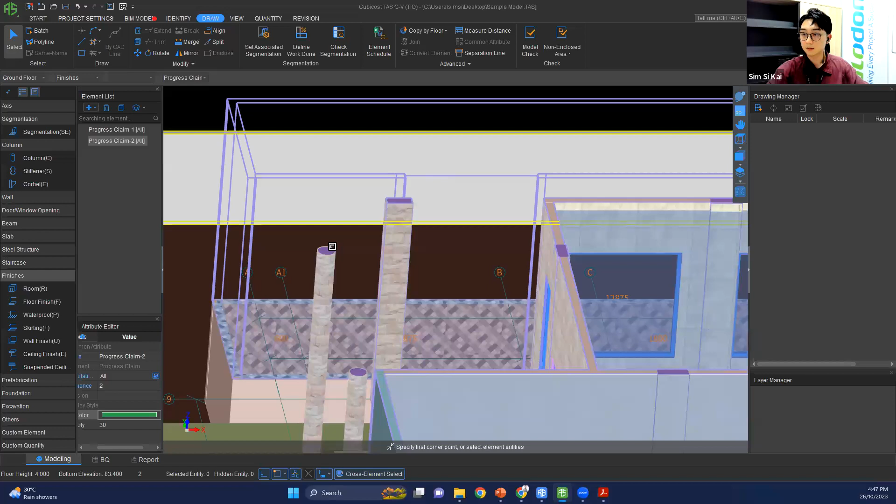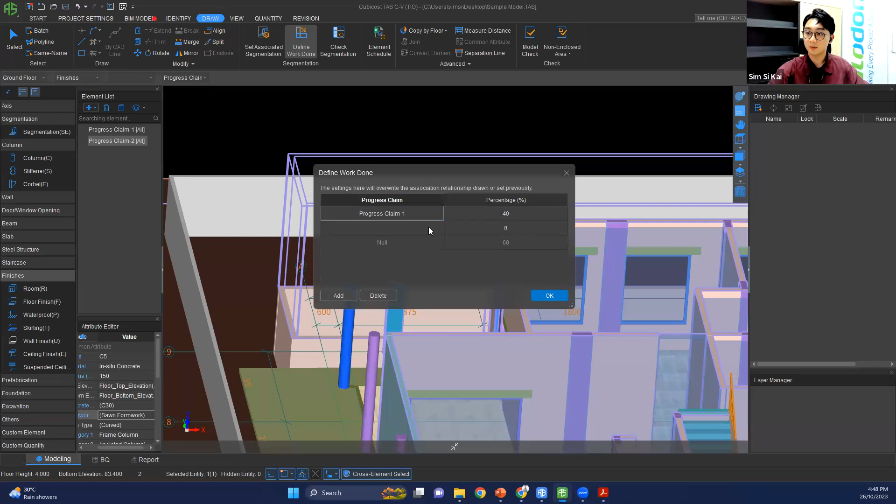So for example, this column, I wish to claim progress claim number 1 for the formwork, then concrete for progress claim number 2. Also can be done. This is the second method where we can actually do claim by trade. And lastly, for vertical elements, we can also do it by percentage. So for example, Define Work Done, progress claim number 1 is 40%, and progress claim number 2 is the remaining 60%. Also can be done.

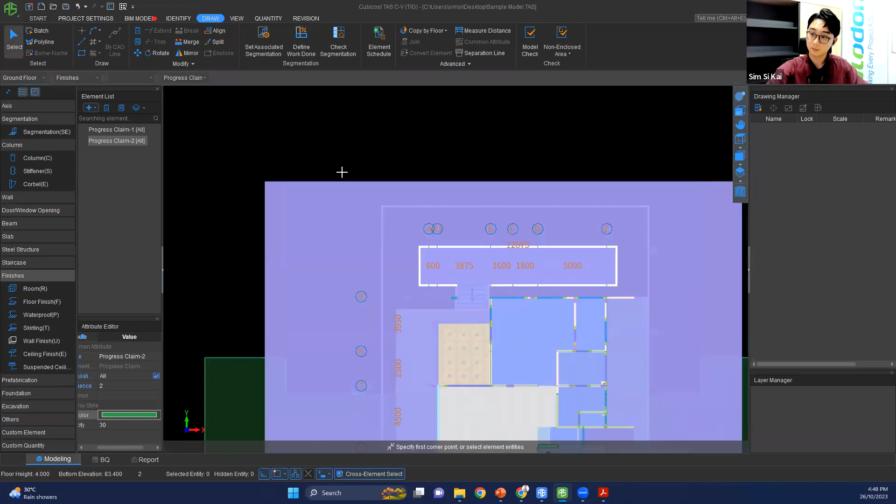So for example, let me calculate it. Your expression. As you can see here, oops, I did it in a way that I should have deleted off this progress claim. Progress claim number 2 is 60%. Alright, press OK. And as you can see here, your expression. Let me calculate once more. It will show you 40% progress claim number 1 and 60% for progress claim number 2.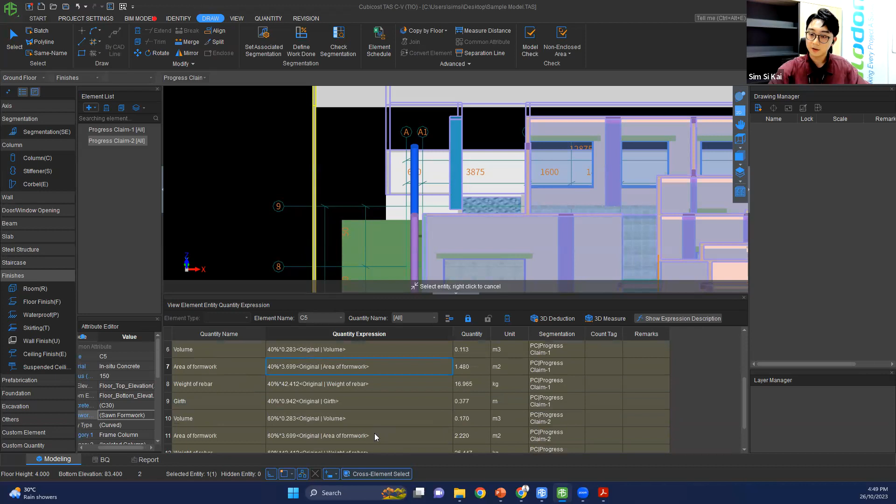So this is where our contractor QS will tend to use this feature to actually do their progress claim. And of course, when it comes down to progress claim, you need to submit proof. So you can actually use the BIM model, save those as pictures. But what kind of picture can be saved?

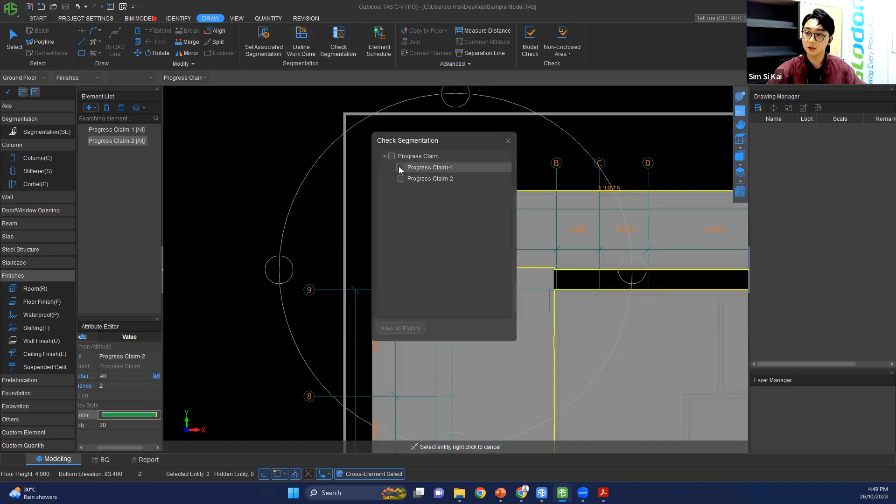So for example, you can utilize this feature, check segmentation, progress claim number 1. I want to see all the progress claim number 1 claims. Like for example, this one, this orange color one, right, is actually claimed under progress claim number 1. Let me show you progress claim number 2, much better. So this area, this particular column, top part 60%, is actually part under progress claim number 2. So these are the things that have actually been captured in this progress claim number 2. You can save it as a picture and submit with your claim.

So that's how our contractor QS can actually utilize this feature to do their progress claim when it comes down to post-contracting work. And lastly, also, if users have, for example,

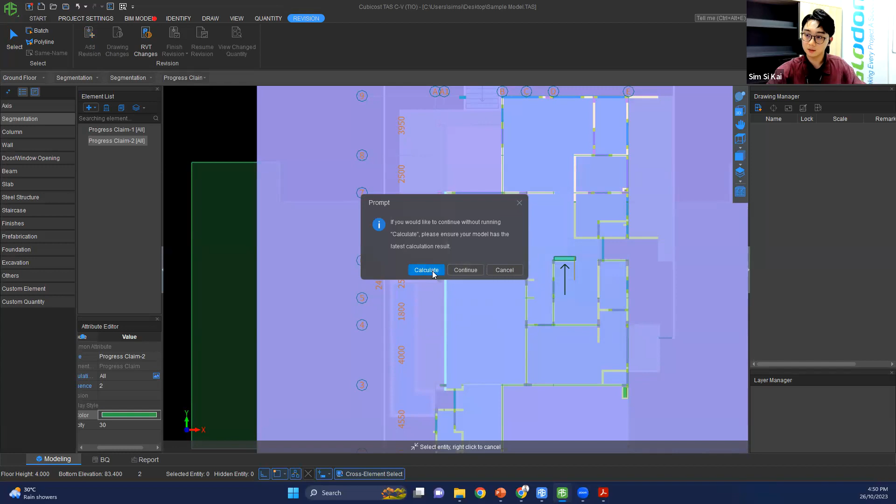revision, like for example change of design, but then again you want to do a comparison after that, they can also use this feature, which is create one revision, calculate - for example, because you need to have a base quantity. So let me calculate.

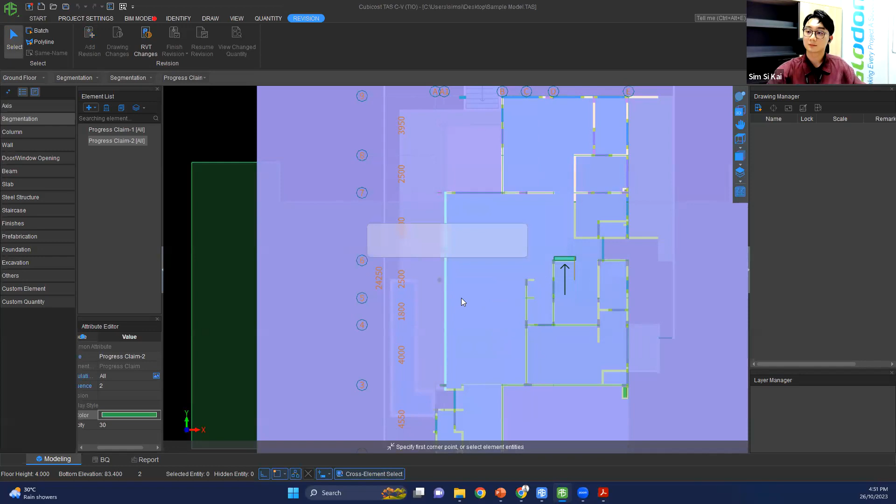Once you're done, then for example, let me do some minor adjustment towards the model so that you can see the difference. And just finish it. Once you've done some adjustment towards the model, you can finish it. Then, of course, you need to calculate again.

Okay, then you can use this feature, which is view changed quantity. It will actually show you a clear cut - for example, ground floor column - what is the before and what's the after revision, and what are the changes. So when it comes down to, for example, there's comparison between two different designs, after you make adjustment, what is the impact? All this can be done using our software.

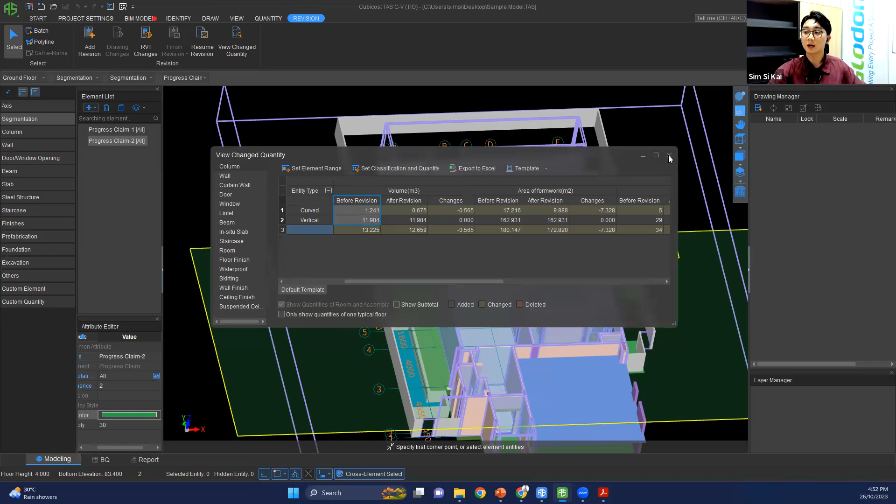When it comes down to, for example, change of design, and then you want to keep a base, and then you want to do comparison, this can be done using our software. Alright, so let me return back to the slides. So let us go towards the end because the time is limited.

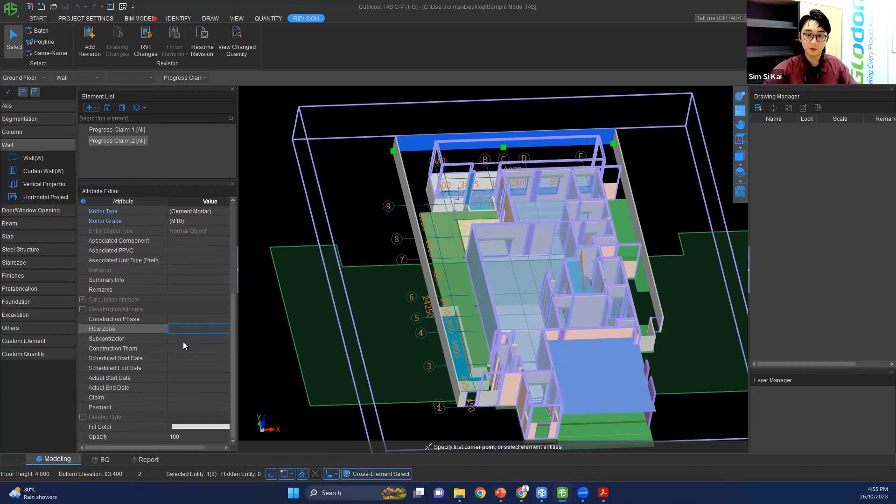Like for example, wall - there's a section here that you can key in, like construction attributes. You can key in relevant information, like subcontractor, scheduled start, schedule end, actual start, and actual end. Basically these are the pieces of information that you can utilize.

And once you key this in, if you wish to view it back in your quantity, yes you can. Let me show you, for example, subcontractor, for testing. So once you're done, make sure you calculate the whole model.

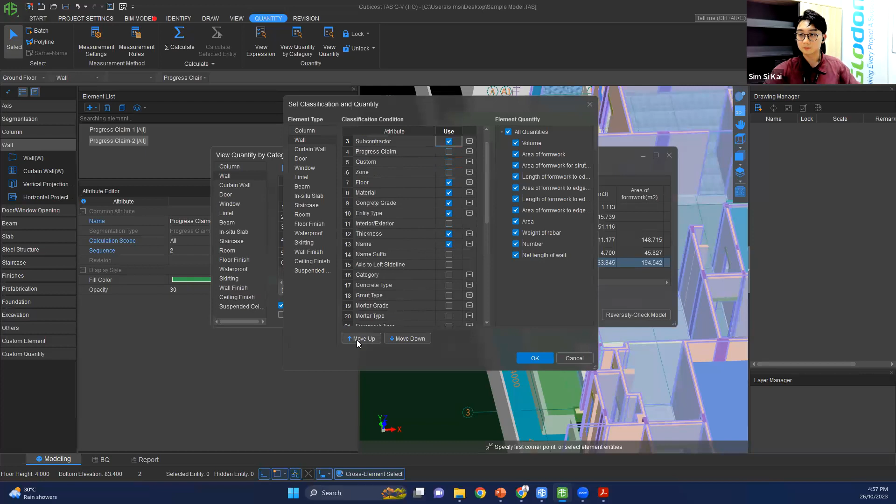Okay, then under view quantity by category, ground floor, then under wall for example, you can set here that you wish to view subcontractor. Just now what I did was move it up, and then it will actually reflect here.

So these are the things you can utilize when it comes down to schedule data and so on. Like I said, it's more focused on 5D BIM. It's not so much like, for example, nowadays we also receive a lot of feedback asking if there's any solution that governs the whole construction from start to end, more like project management type of software. So I hope this is able to help you on that.

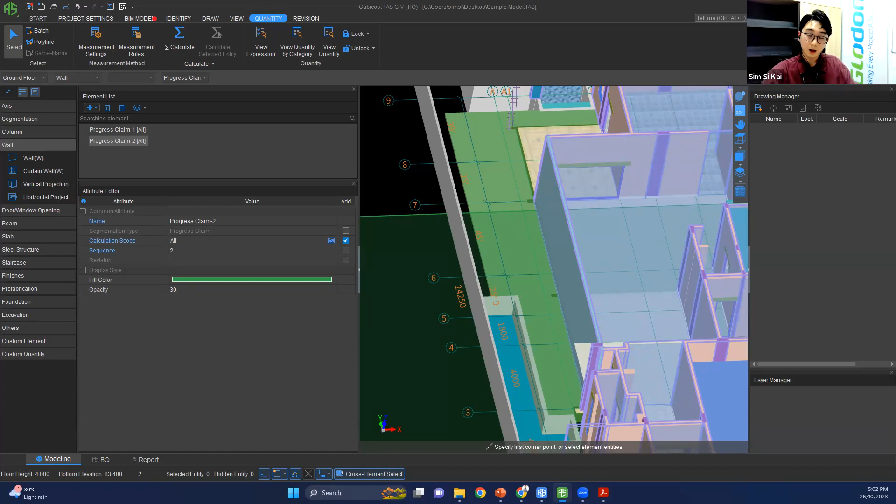First, it can help you with the quantity side. The quantity side is very net - very, very net. In the conventional way of QS, we tend to allow some margin, but on our side it's very net.

When it comes to the costing side, you can build out your unit rates in detail - how you want to play around with your materials, equipment, and labor. You can adjust those rates, form your unit rates, mark them up or down, and link them to your bill items. From there you can also control things.

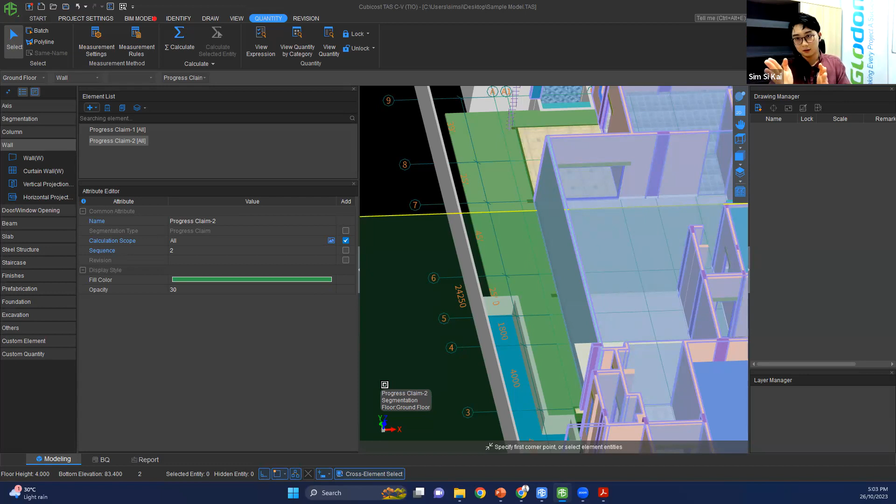For example, if the unit rate for CC30 is too high, you just quickly adjust it and you're directly able to view the outcome. This helps you have better control because you can directly see the results once the adjustment is made. So that's how TAS, TRB, TBQ can help you.